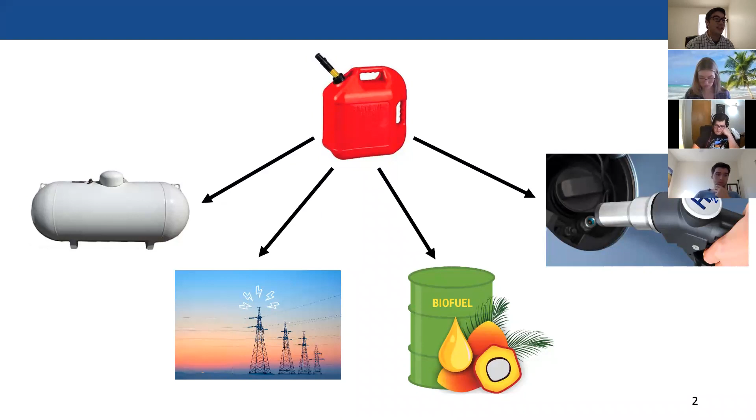Okay, so the Renewable Fuel Standard was actually first enacted as part of the Energy Policy Act of 2005 during Bush Jr.'s administration. And it was then extended by the Energy Independence and Security Act in 2007. And the main idea of this standard is fairly straightforward.

Essentially, it wants renewable fuel to be blended into transportation fuels. And we increase every year up to 36 billion gallons of this renewable fuel by 2022. And just to give some context, the United States consumes roughly 150 billion gallons per year.

And that could actually be plus or minus quite a lot, depending on how demand changes over time. And so, as you can probably imagine, in 2020, due to the pandemic, that consumption rate decreased quite a bit.

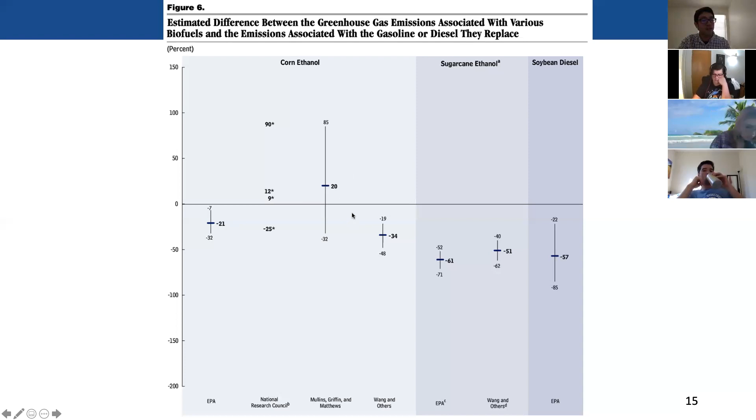Yeah, and so making sure that you really get that right and you understand the uncertainties associated with it are really critical for this program. And really understanding the differences between why initial modeling had come up with these numbers versus why you get so much higher in some other cases. There has to be something really fundamentally different about the way that the work had been done.

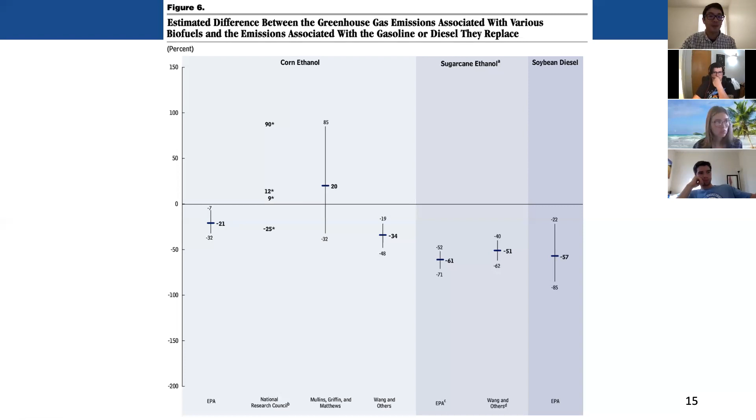Okay, so in a life cycle analysis, you include this sort of boundary of what you want to include in the analysis. For those who are familiar with life cycle approaches, essentially you're going to go back in the production stage up to a certain point before you decide to make a cutoff. And that cutoff is somewhat arbitrary in nature. You always have to make some kind of internal decision about when you can draw this boundary for your analysis.

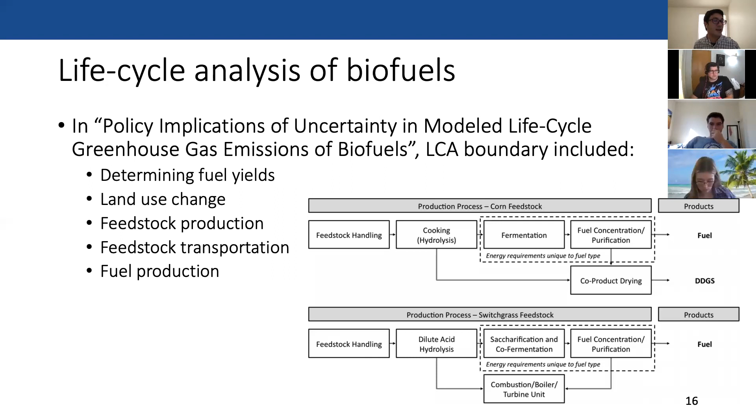But the land use change has to do with, okay, if I were thinking about growing a particular crop in this area, right? In the counterfactual, what would I have grown otherwise? And that in itself will have a whole set of emissions associated with that counterfactual that you then have to account for and measure in that difference for your analysis of what the land use change emissions are going to look like.

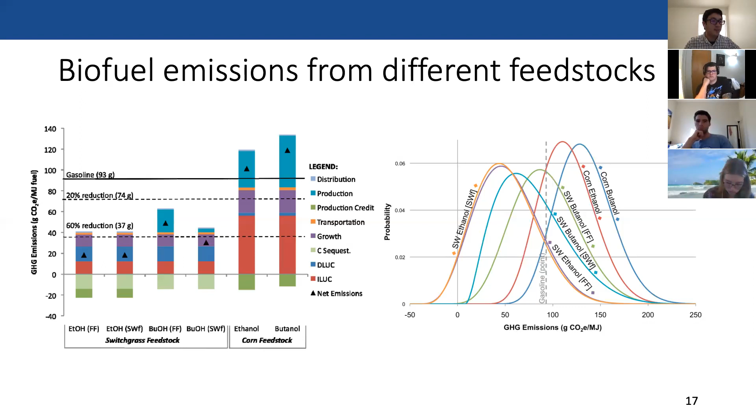And actually, this particular work was done by a graduate student. So you have the potential to make a big impact even as a student.

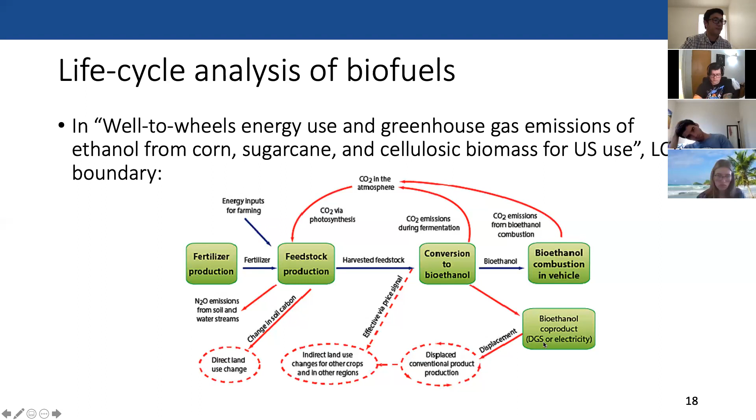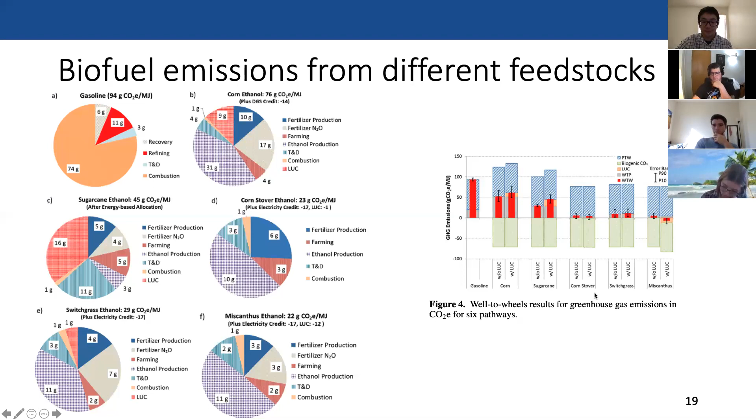And just to show how they compare between these two studies. Even though the ultimate answers are fairly different, if you match up the components that are actually included within the model, you'll see that they actually agree fairly consistently. If you were to subtract out the red portion of the indirect land use change, you actually end up getting fairly consistent numbers for the greenhouse gas emissions.

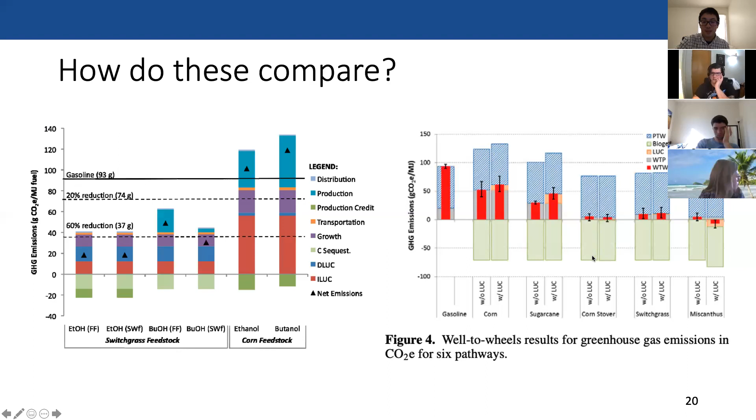And so this does provide a lot more impetus for the analysis that is talking about how you're displacing the use of this resource for fuel, and therefore the demand is going to look to other sources to make up for it. Some of that has been an increase in the amount of corn that is planted and trying to get higher yields. That's going to compensate a little bit for this higher demand from fuel due to RFS.

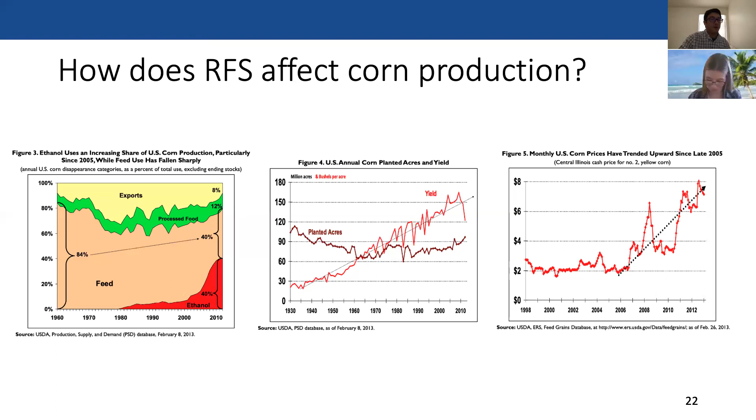So yeah, I think that wraps up our discussion about renewable fuel standards. And now we'll talk about low carbon fuel standards. So really, if we zoom out and take a 10,000 foot look at these regulatory requirements, at the end of the day, the renewable fuel standard is really the volumetric requirement for using some amount of biofuels, and possibly in the future it may include things like electricity, and that is an important mechanism for helping to transition into the use of these alternative fuels.

But what it doesn't do directly is think about reducing emissions. And we can really see that from the analysis; there's a lot of back and forth about how much emissions we are actually causing from ethanol. But at the end of the day, it doesn't really care about that. As long as you're using it, you're fulfilling the requirements for RFS.

So the low carbon fuel standard is in principle similar to the renewable fuel standards in that it is inherently a mechanism to get us to use alternative fuels. But instead of a volumetric requirement, it's based off of an emissions requirement. And so all the signals in the low carbon fuel standard are making sure that you are transitioning to a fuel that's going to lower emissions over time. And that's really one of the fundamental differences between the LCFS and the RFS as it currently exists.

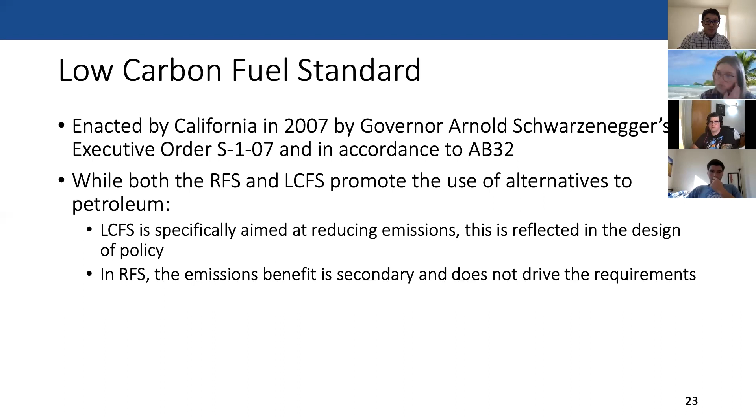Okay. So after the state legislature passed a bill that basically required the low carbon fuel standards, the California Air Resources Board is the entity tasked with actually administrating that standard. There was an executive order that then required the California Air Resources Board to coordinate with the University of California, the California Energy Commission, and other state agencies to propose a schedule to meet the 2020 target.

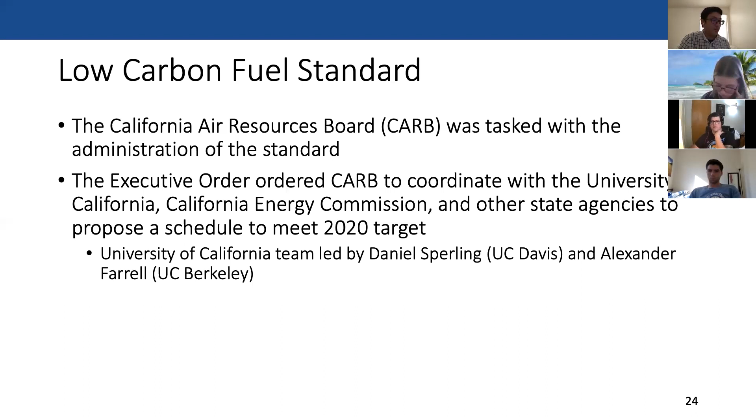And that University of California team was led by Dan Sperling, whom I'm sure most of you know or have spoken with. He's the head of the Institute of Transportation Studies here, and Alexander Farrell, who's a researcher at UC Berkeley.

Okay, and so the really novel thing about LCFS, and it's not the only policy that has done this, but one of the unique things about the formation of this regulation is that it is really science driven, and even before the creation of the rule, relied on a whole set of independent studies in academia, not just from members in the regulatory agencies, and not just counting on stakeholder interaction. It is fundamentally a science-driven policy.

Okay, so general motivations. These are kind of coming straight out of that study, thinking about greenhouse gas emissions. In California, at least, we've put a lot of emphasis into transportation policies, and that's kind of rightly so, because transportation accounts for the bulk of the emissions from our state.

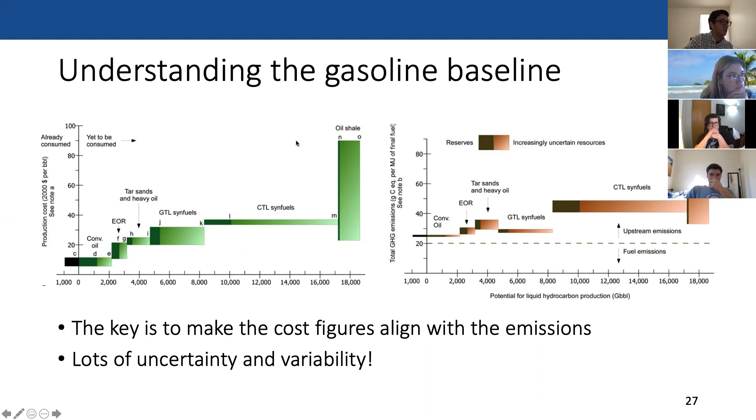So forecasting future gasoline consumption. These are models that I've mentioned before in our class. So this VISION model in California, which is a stock turnover model with a whole bunch of different parameter and attribute inputs that you can mess around with. So they were using this to try and figure out what the gasoline demand would be over the next decade.

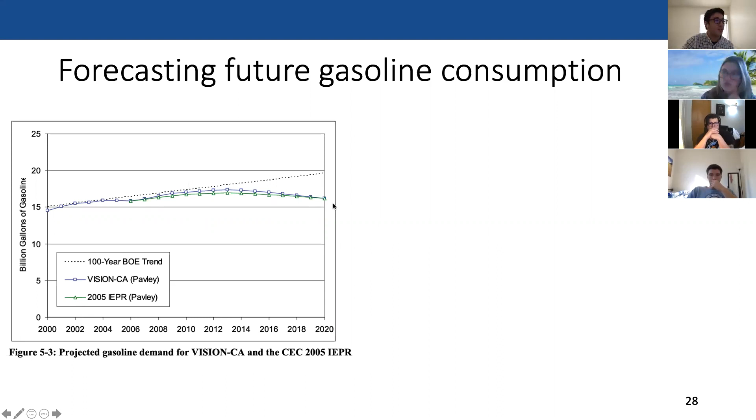To understand some of the impacts, you have to be able to forecast cost estimates of your different fuels, and in that way be able to understand how credit prices in LCFS would affect the market. And so there's within the study these cost estimates that are based off of breaking down all of these costs that would go into the production of the fuel.

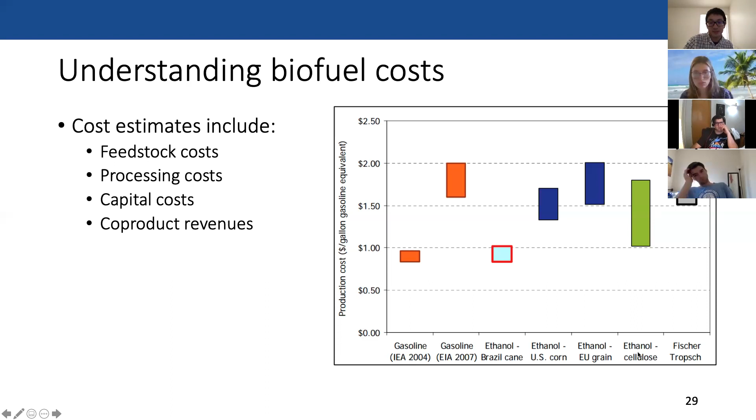Electricity costs are also included, and this is also a fairly difficult type of thing, where you basically have to look at the supply of electricity and the corresponding wholesale prices, and estimate what the cost will be for electric vehicles relative to gasoline.

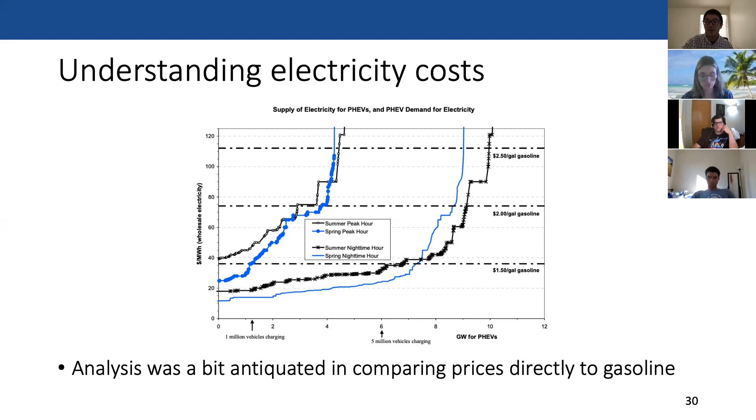Okay, and so that part of the study in estimating the costs was very important to understand how the market and prices would be affected by the introduction of this policy. But then the other really important thing is to get at estimates of carbon emissions.

And so this is the global warming impacts estimated by two different LCA models adjusted for energy at the wheel. Right now I'm just showing one model called GREET, which is a model developed at Argonne National Lab. It's an LCA model that measures essentially the life cycle emissions of each of your different fuel types. And so it gets pretty specific, right? We can look at emissions per megajoule for all of these different fuel types.

And for certain fuel types like ethanol, we can actually go in and look at different production methods, right? So if it's based off of a coal-fired dry mill compared to cellulosic ethanol, you have vastly different numbers. And remember, everything is being compared to your marginal gallon of gasoline.

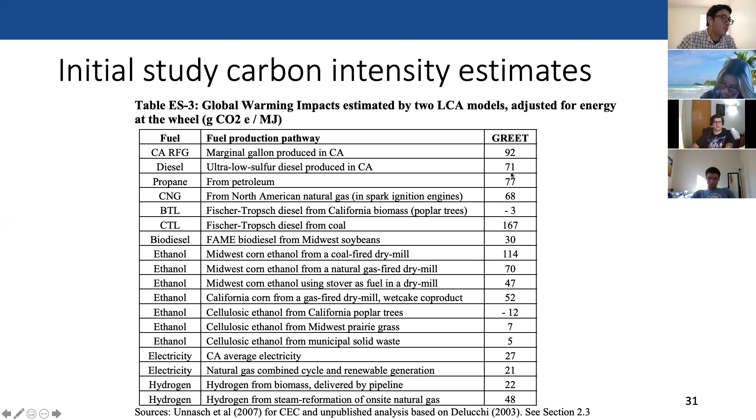Okay, and so the LCF standard, I'll have some slides on that later. I'll get back to that. So let's get back into the derivation of some of these numbers. So introducing life cycle assessment into policy. As far as I'm aware, this is actually one of the very first policies that include life cycle analysis. And so it's really neat to see a lot of this fundamental research coming into play in practice for the development of this regulation.

And so in the study, they talk about well to wheels, so the emissions over the entire lifetime. So the GREET model, the one developed at Argonne, does include life cycle analysis, but there were a whole bunch of specific concerns that were brought up in this original study. So treatment of market-mediated effects. So how are things consequentially affected?

And so even if I do the life cycle emissions of this particular chain of events, that is actually replacing something else. And that alternative is one that you may need to consider, because you can actually have substantial differences in what we expect the emissions would be with and without the policy. And that's one of the most difficult things to measure.

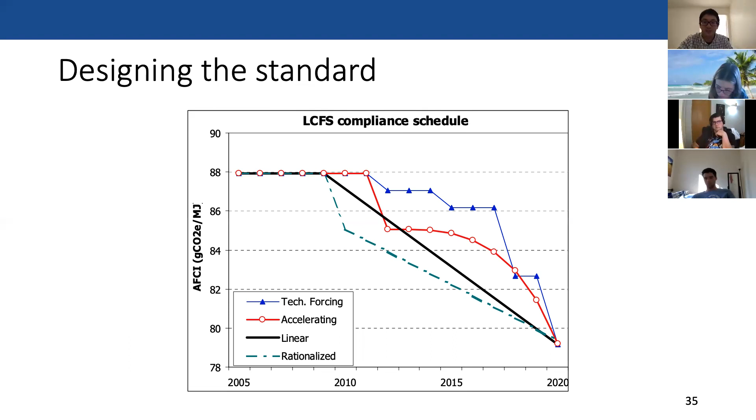So the study ultimately makes these 22 concrete recommendations. So they want the scope to cover providers of non-liquid fuels, so electricity, natural gas, propane, and hydrogen. We know that a lot of these fuels are really viable alternatives to gasoline, and that we shouldn't just use liquid-based fuels. Otherwise, you're picking and choosing winners already, right? You want to give all of the different fuels a chance to participate in this program.

Baseline should cover most recent year and be applied uniformly. Upstream emissions should be included through LCA, including land use change. And this one was pretty clever, and actually has been replicated in other policies.

So the way that it works right now is that if I produce a fuel in a certain way, then CARB, through their own studies or analysis, comes up with these default values for how much it assumes production of electricity or ethanol production has, in grams of CO2 equivalent per megajoule. And those values are really, really pessimistic. And so you always get the worst end of the deal by using these default values. But if you are a producer or provider of these alternative fuels, you can actually go to CARB and say, hey, look at the pathway that I'm using to produce this fuel.

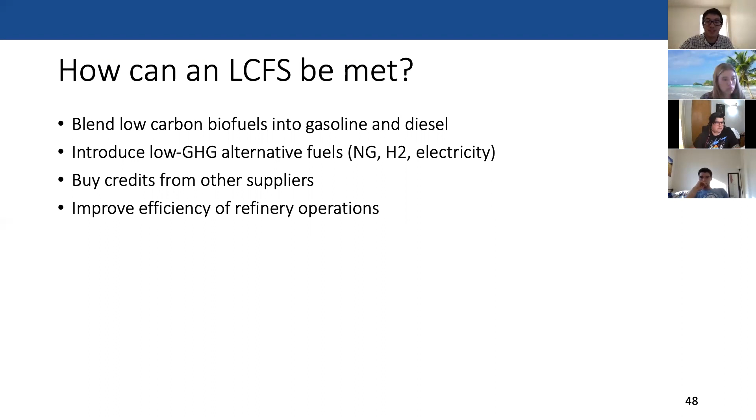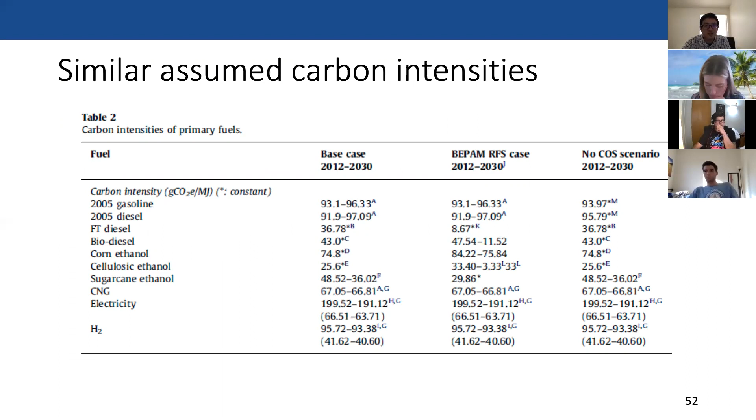They assumed pretty similar carbon intensities, probably a little bit different in some cases, particularly with the electricity grid, for example, which is fairly different from California's through the rest of the country. But for the most part, the carbon intensities they assumed in this model were fairly similar.

Okay, let me see. Do we have enough time to talk about this? Actually, I'm going to end a little bit early today. So the last thing that I want to talk about is electricity and LCFS. But I think what we'll do instead is to cover this in Wednesday's lecture. I don't think we have quite enough time to get through all of the electricity part of LCFS. And I do want to leave a little bit of time for questions in case anyone has any. And then a couple administrative things to talk about before we wrap up.